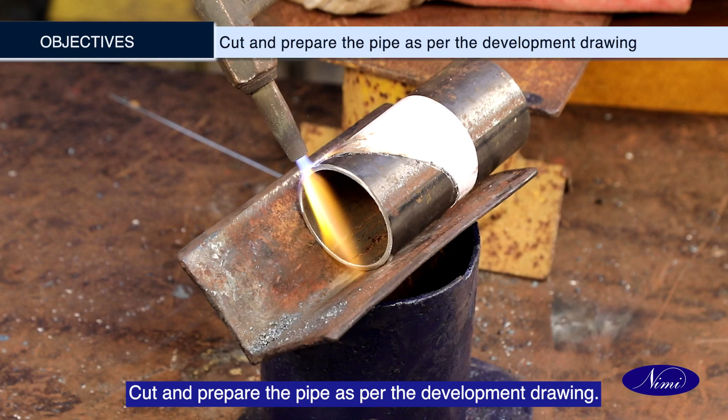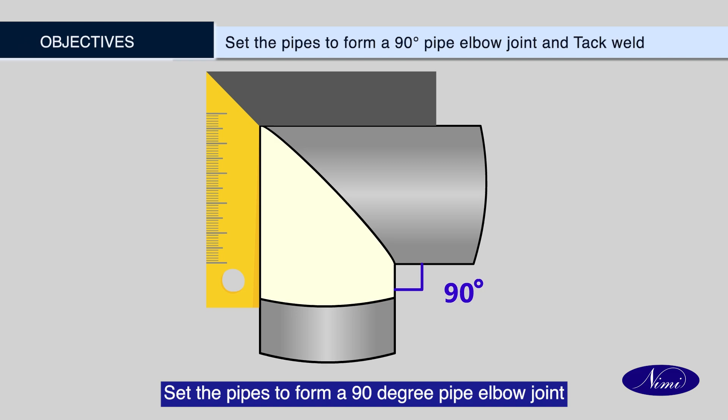Objectives: At the end of this exercise, you shall be able to cut and prepare the pipe as per the development drawing, clean the oxides and burrs from the welding surfaces, set the pipes to form a 90-degree pipe elbow joint and tack weld, and visually inspect for weld defects.

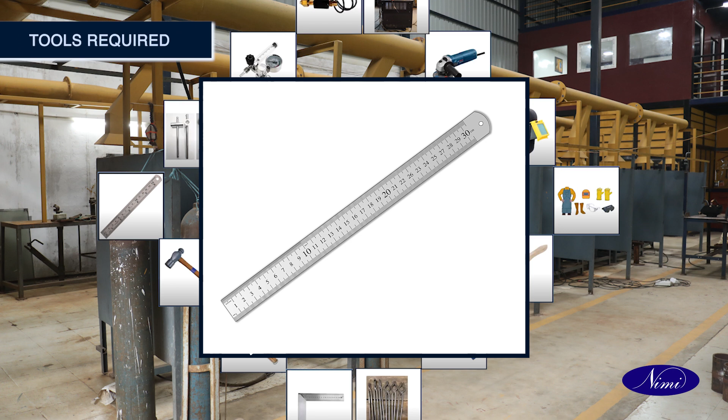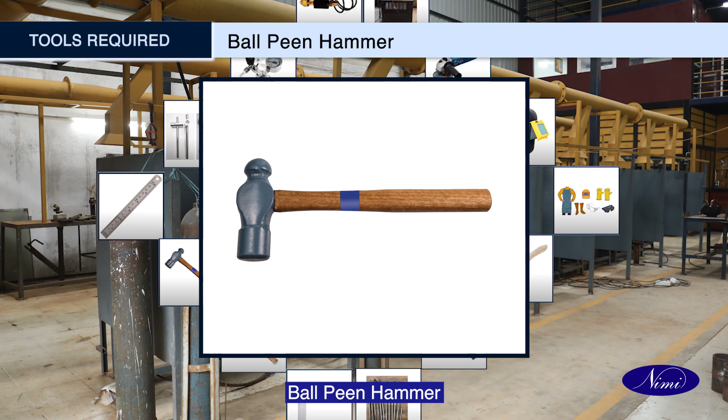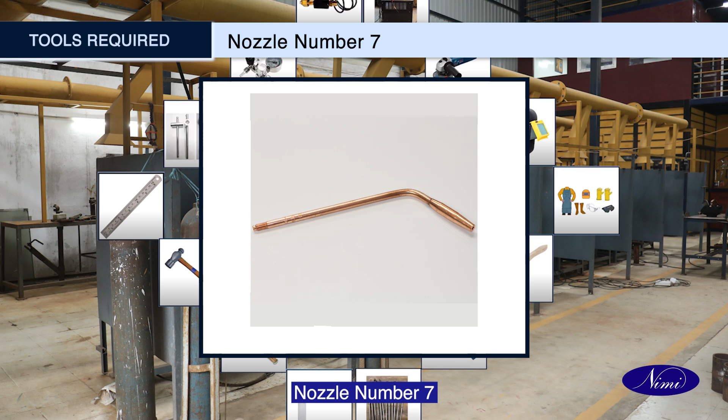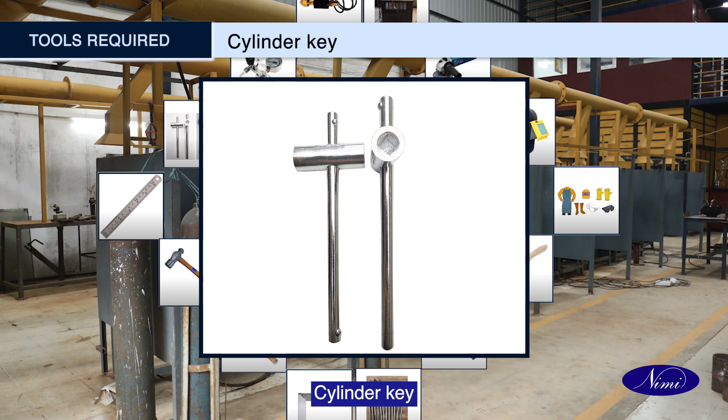Let's see the tools required for the welding process: steel rule, center punch, ball peen hammer, angle grinder, half round file, bench vise, tri-square, chipping hammer, steel wire brush, safety clothing, gloves, PPE kit, nozzle number 7, CCMS filler rod 3 mm, OAW setup, cylinder key, tip cleaner, spark lighter, gas welding goggles. Let's see the pre-welding process for pipe elbow joint.

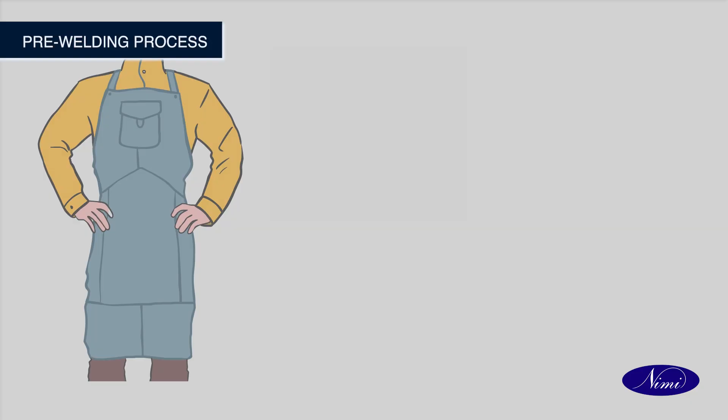Follow necessary safety precautions.

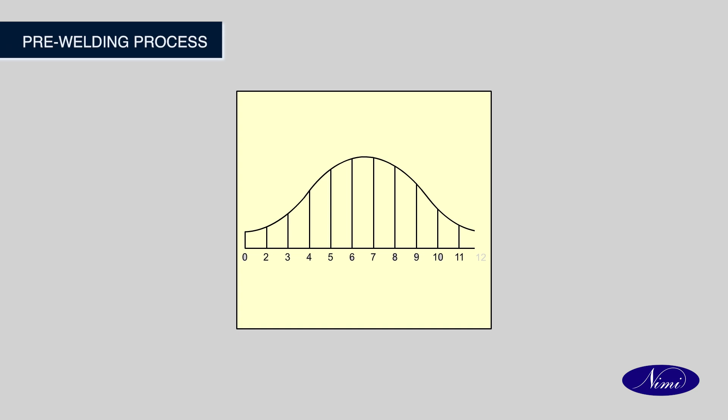Draw the development drawing with the dimension on the circumference of the circle and make it into 12 segments. Draw the elbow profile with the intersection points of horizontal and vertical projection lines.

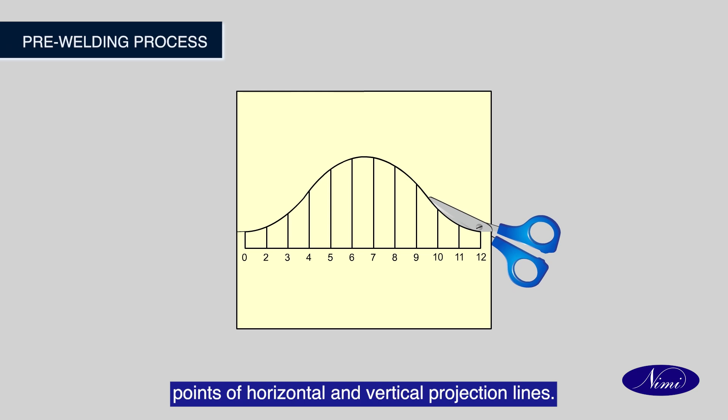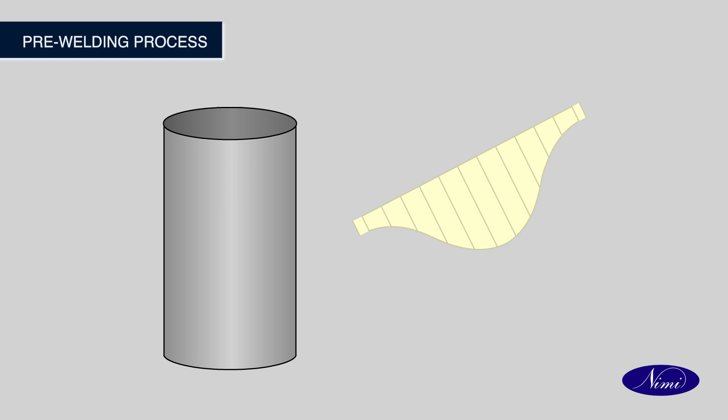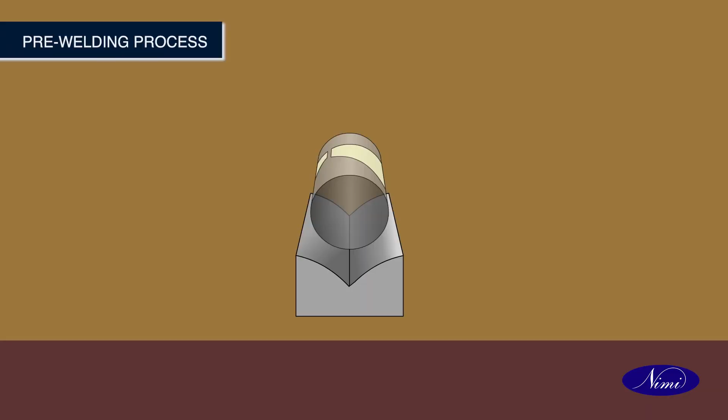Cut the profile sheet and paste it on the end of 2 pipes. Punch mark along the profile line.

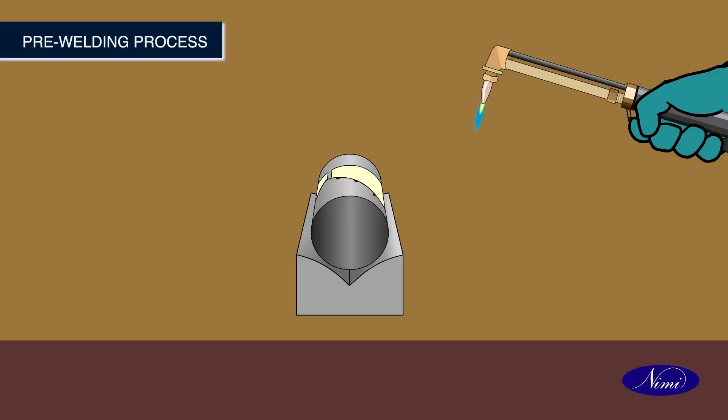Cut along the profile line using OAW gas welding and angle grinder.

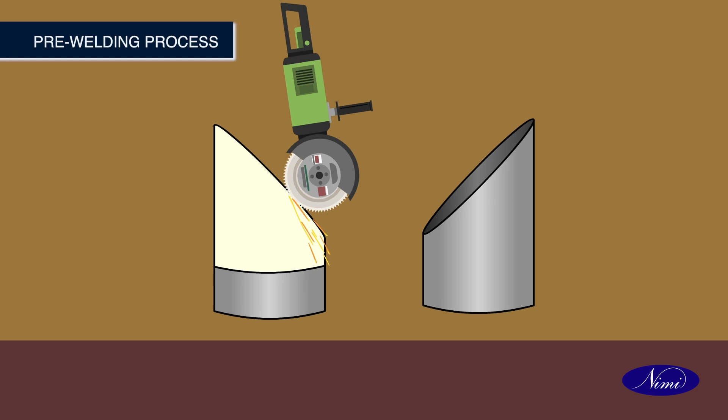Deburr the cutting edges and file along the profile curve. Match the 2 pipes at an angle of 90 degrees and file the pipes for any irregularity.

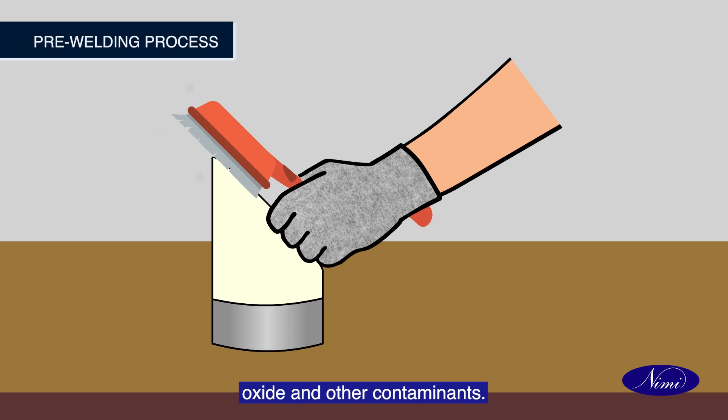Clean the surface of the pipe of any oxide and other contaminants. Set and align the pipe to an angle of 90 degrees.

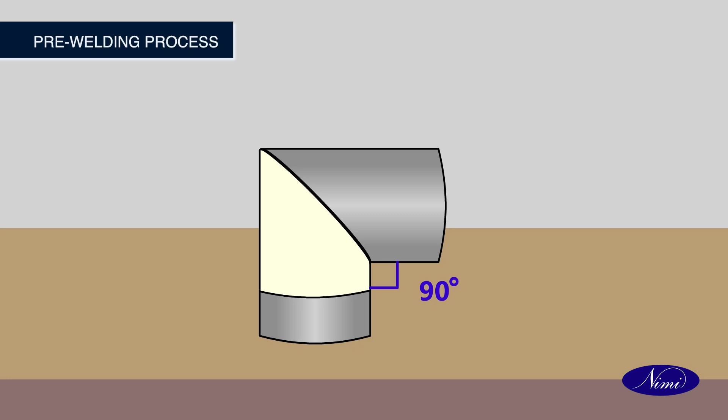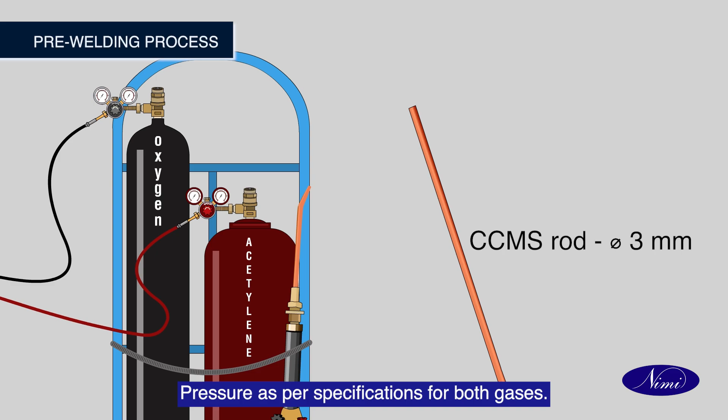Select nozzle number 7 and 3 mm dia CCMS filler rod. Set pressure as per specifications for both gases. Tack weld the joints at 4 places with 1.6 mm root gap.

Check the 90-degree angle.

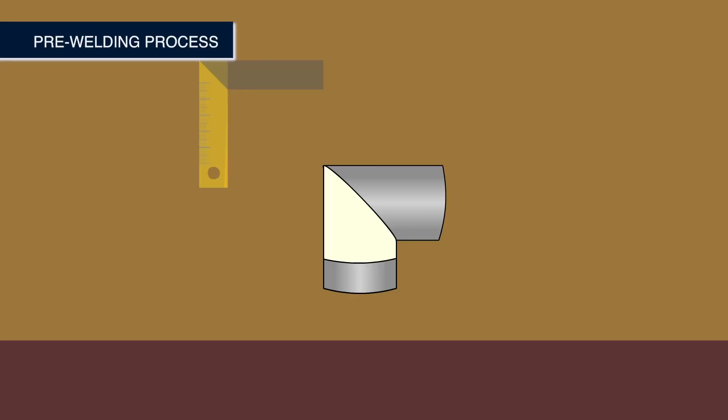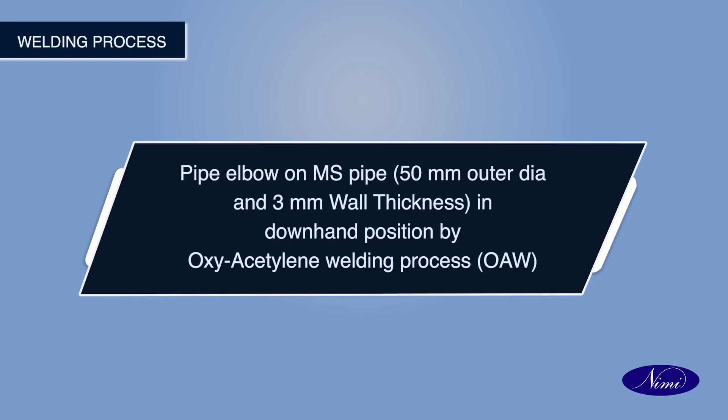Now let's see the welding process of pipe elbow on MS pipe, 50 mm outer dia and 3 mm wall thickness in downhand position by Oxy-Acetylene Welding process, OAW. Keep the tack welded MS pipe on the welding table.

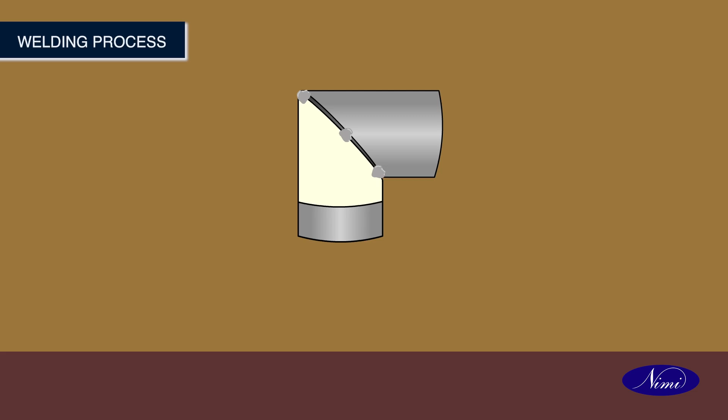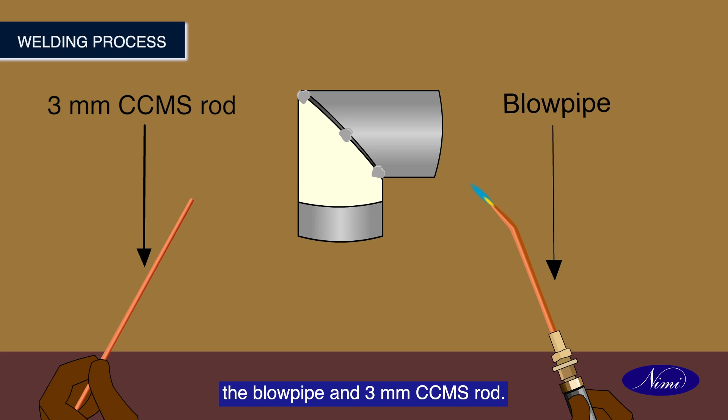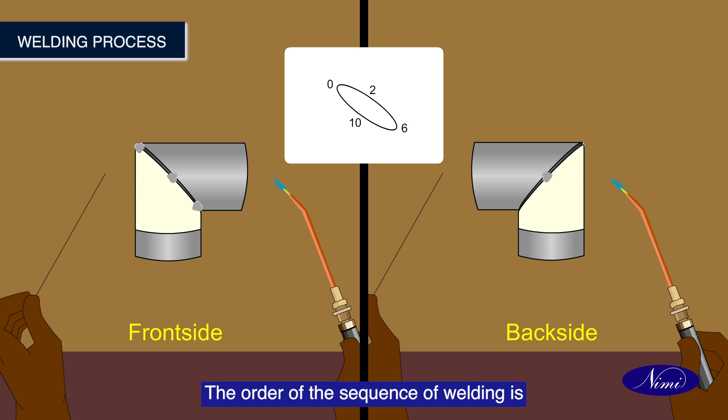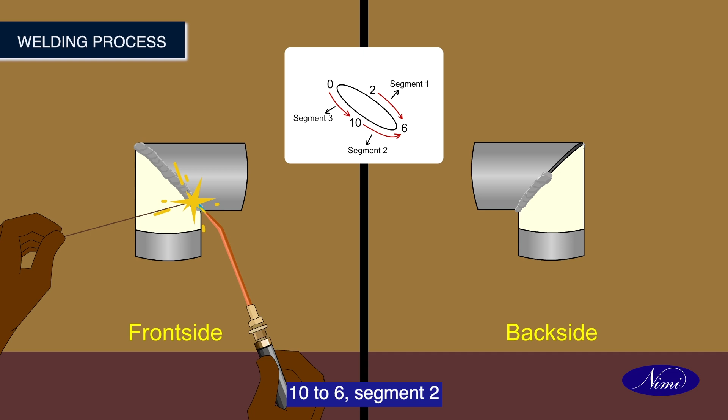The tacked pipe joint, which is in the form of an ellipse, has to be welded in 4 segments. The order of the sequence of welding is: 2 to 6, segment 1; 0 to 10, segment 3; 10 to 6, segment 2; 2 to 0, segment 4.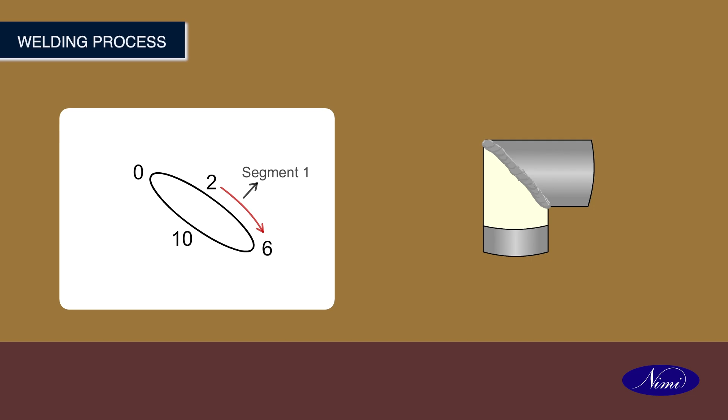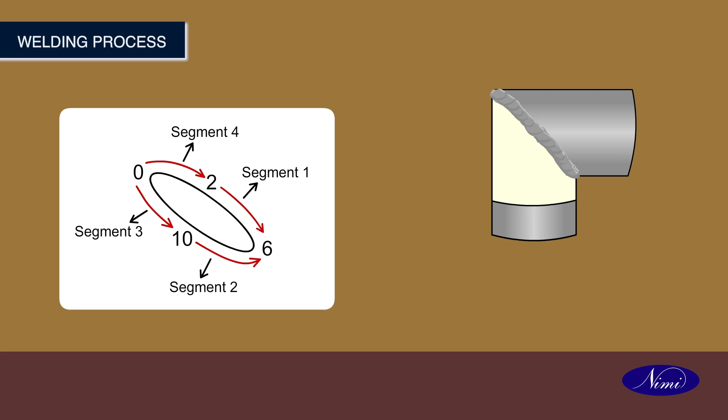This order of welding sequence will help to control distortion such that the welding is partially done vertically upwards and partially in downhand position. Ensure maintaining the keyhole and ending the weld of each segment properly to get the root penetration. Avoid excessive penetration.

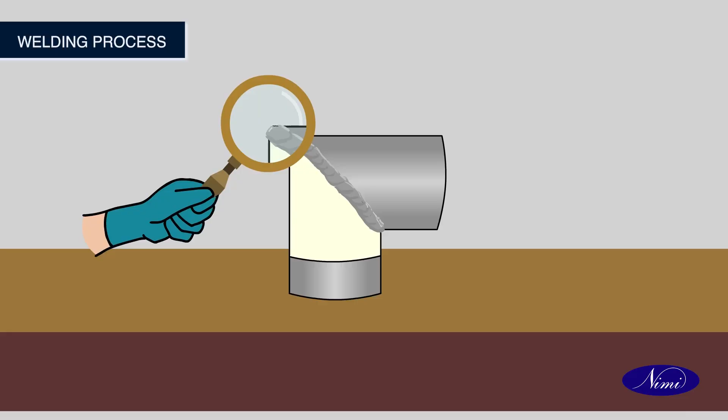Inspect weld for any surface defects.

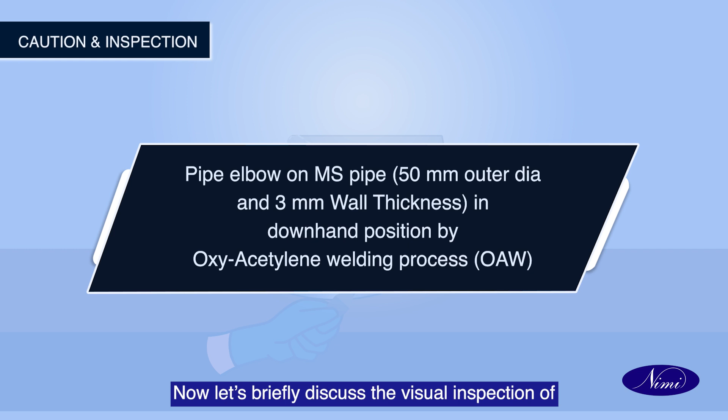Now let's briefly discuss the visual inspection of pipe elbow of MS pipe 50 mm outer dia and 3 mm wall thickness in downhand position by OAW process.

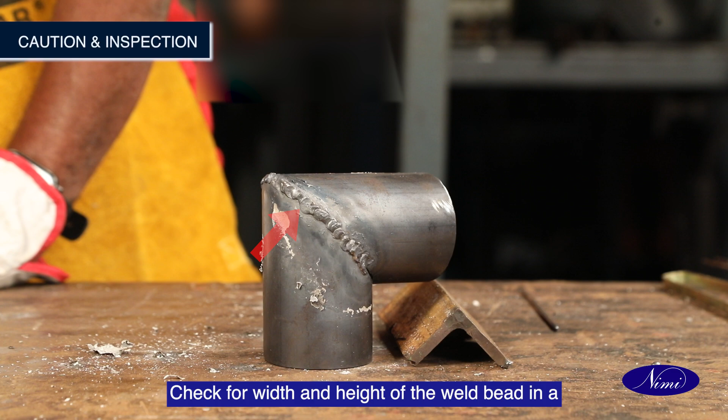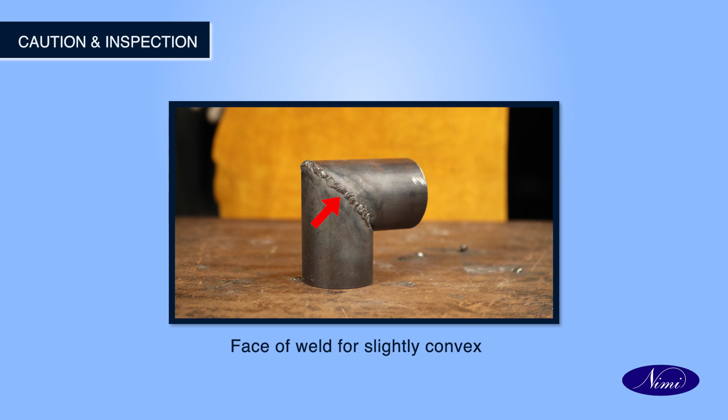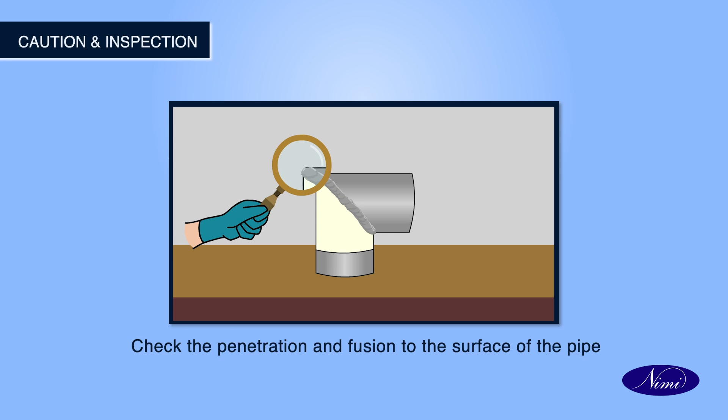Check for width and height of the weld bead in a uniform pattern, even ripples, free of voids and high spots. Face of weld should be slightly convex. Edges of weld beads should show good fusion, no overlap and no undercut. Check the penetration and fusion to the surface of the pipe.

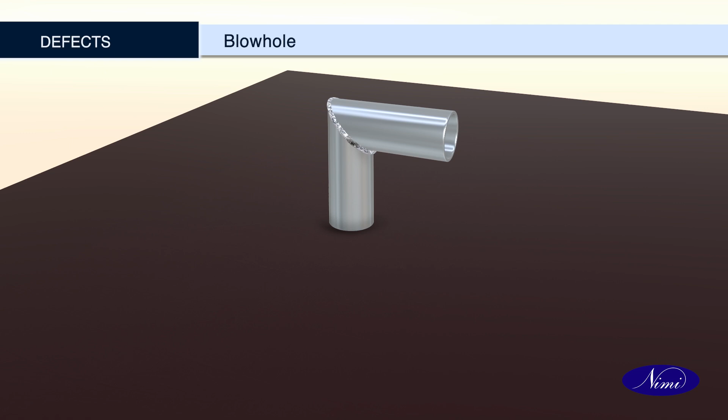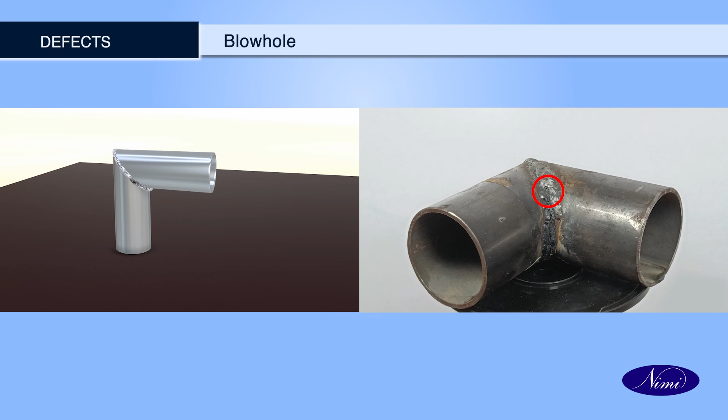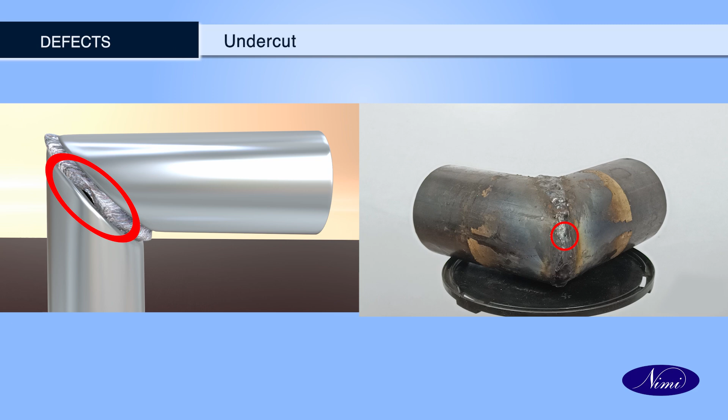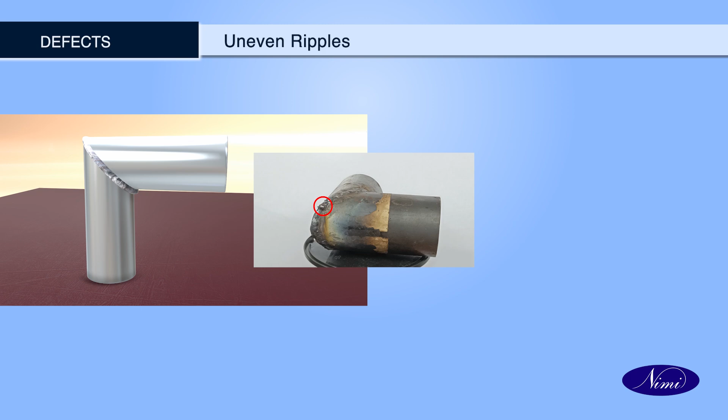Let us see the defects now: blowhole, undercut, uneven ripples, improper fusion.

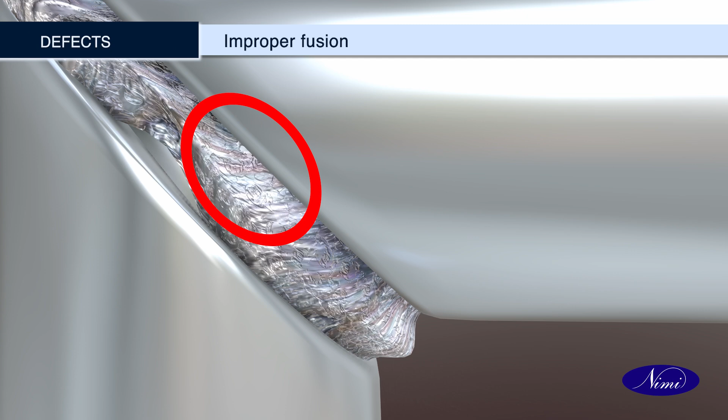Recap. In this topic, we have learned to cut and prepare the pipe as per the development drawing, clean the oxides and burrs from the welding surfaces, set the pipes to form a 90-degree pipe elbow joint and tack weld, weld using OAW process, and visually inspect for weld defects. Thank you, students, and let us meet in the next session.